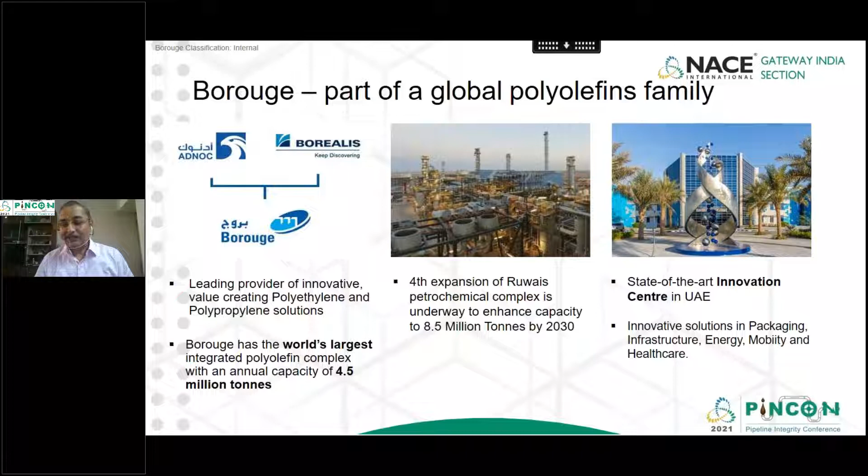Keeping with our innovation mindset, we have a state-of-art innovation center in UAE, and we offer innovative solutions in packaging, infrastructure, energy, mobility, and healthcare.

Couple of examples in infrastructure: we provide raw materials for pipes which are used for water and gas distribution, hot and cold water, double wall corrugated pipe for sewage transport, material for geomembrane, large diameter polyethylene pipes for seawater intake and outfall lines, and three-layer polyethylene and three-layer polypropylene coating material for corrosion protection of steel pipelines cross-country for transportation of oil, gas, and water.

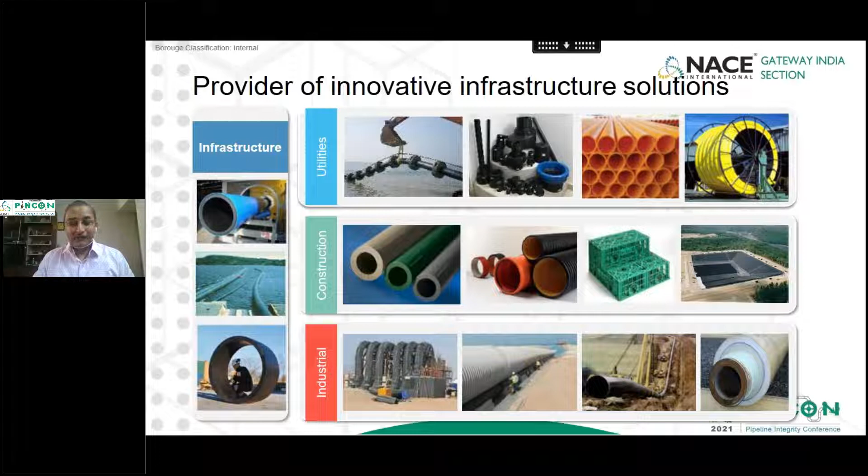Coming to my today's topic, polyethylene is used in different parts of a city gas distribution network. The first part is the high pressure network where the pressure can be anything between 19 bar to 90 bar. There, steel pipes with three-layer polyethylene coating are used. The three layers are epoxy, MDP adhesive, and polyethylene top coat.

In the distribution network for medium pressure lines, orange P100 HDPE pipes are used up to 7 bar pressure. And in the last part of the network, in last mile connectivity, yellow MDPE P80 pipes are used, which are for lower pressure and smaller diameter pipes.

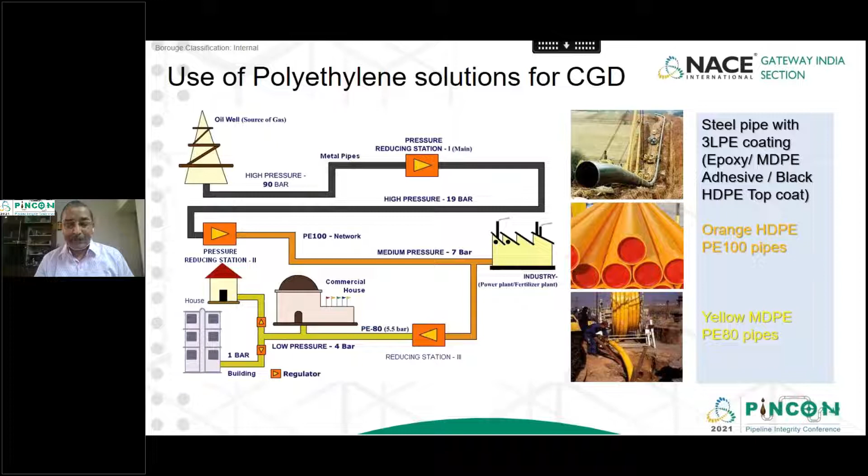If we look at the evolution of gas pipe infrastructure, pipes were used for gas much before they were used for water or sewage. In the 19th century, very early 1900s, they were used for street lighting, and for this cast iron gas pipes were used.

During 1950, cast iron pipes for a short period gave way to ductile iron pipes, but ductile iron pipes did not remain there for long. There were a lot of joint leakages and subsequent explosions which took place in UK, Ireland, Scotland, etc.

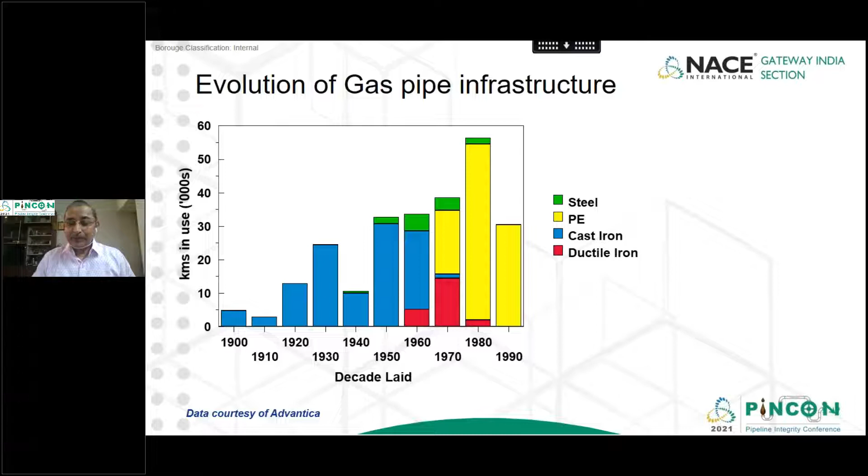Then the fully welded polyethylene system came in, and by 1990s, 2000, polyethylene pipes almost captured the entire distribution network. In 1995, the Kobe earthquake in Japan proved that polyethylene pipes and joints had zero breakage, while all other conventional pipe systems had either pipe rupture or joint failure. This hugely boosted the use of PE pipes in gas distribution.

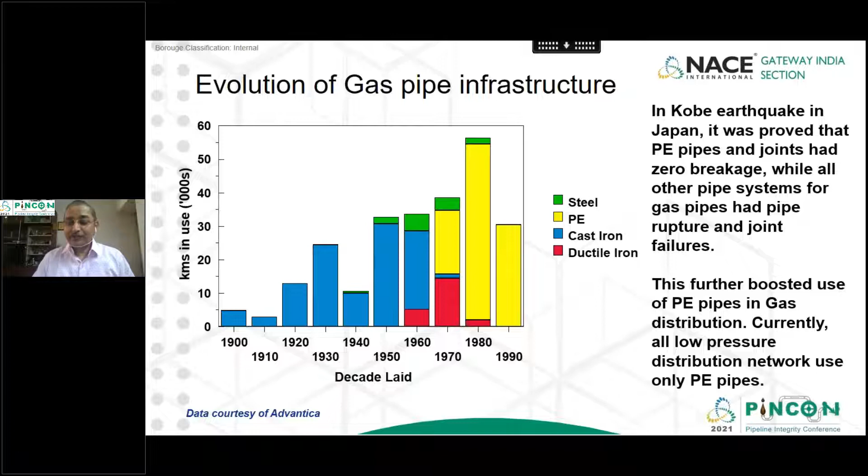Currently, all low pressure distribution networks use only polyethylene pipes. Here is an overview of the city gas distribution pipe segment.

MDPE P80 pipes were first used by British Gas in their CGD network in the 1970s, and HDPE P100 has been used since the 1990s. Some utilities use a combination of yellow P80 and orange P100, while others use only P100 for all their distribution pipelines. Three-layer polyethylene coated carbon steel pipes are used for higher pressures and larger sizes.

In the value chain, it is mandated that pipe materials must comply with individual utility specification as well as national and international standards. The most accepted polyethylene gas pipe standard internationally is ISO 4437-2014. The Indian gas pipe standard is IS 14885-2001, which is under revision.

Three-layer PE coating international standard is ISO 21809-1 2018. This is followed mostly in Europe and other parts of the world, and is followed in India also. However, each Indian oil and gas company has its own specification, and they have taken elements from ISO, DIN, and Canadian standards.

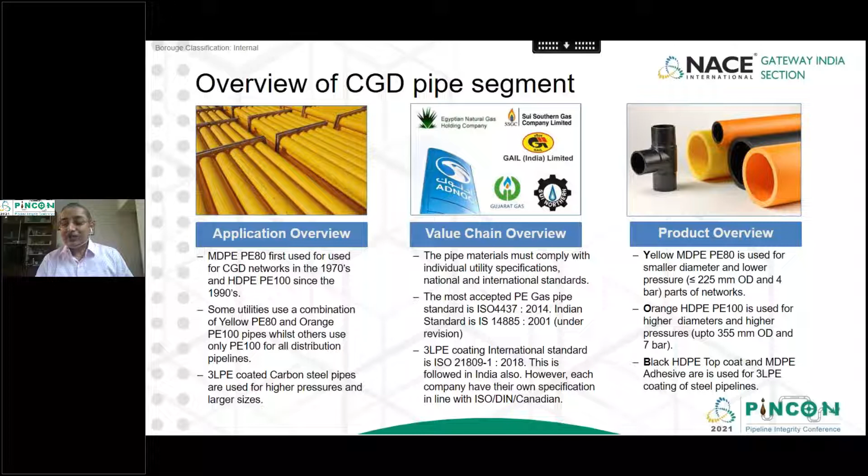In the product overview, yellow MDPE P80 is used for smaller diameter and lower pressure, say up to 225 mm OD and 4 bar pressure. Orange HDPE P100 is used for higher diameter and higher pressures, up to 355 mm and 7 bar pressure. Black HDPE top coat as well as MDPE adhesive are used as part of 3LPE coating of steel pipelines.

Now the debate always comes whether MDP is better or HDP is better. We'll show you both sides.

MDP P80 has certain advantages for smaller pipes. It is a softer and more flexible material. Some gas utilities prefer this, especially for smaller pipes and house service connections. The major advantage is easy squeeze off for service connections and repairs. MDP pipes are easy to coil, reducing the effort of re-rounding pipes that have gone oval. P80 is also easier to weld than P100, being a more forgiving material. Another major advantage is MDP has very high stress crack resistance compared to standard P100 HDP material.

There is a misnomer in the industry: all gas pipes are referred to as MDP pipes, but MDP can only be P80. There has been no P100 possible to manufacture with MDP density. All P100 materials are high density polyethylene.

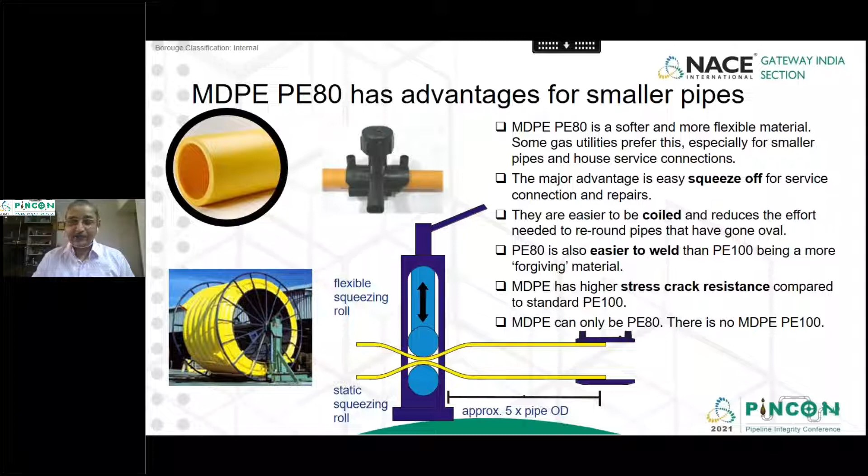Now coming to HDP P100 orange, it allows for higher design pressure. You can see the same MDP and HDP, P80 and P100 material, used in the water industry for up to 16 bar and 20 bar pressure pipes. But in the gas industry, they're used for only 4 bar and 7 bar.

This limitation is because of rapid crack propagation. If a gas pipe is punctured, the crack may propagate instantaneously over a very long distance because gas is a compressible fluid. Therefore, the rapid crack propagation property has to be measured and kept within a limit so that it doesn't propagate indefinitely. Depending on this consideration, MDP and HDP materials are used for lower pressure in gas.

While MDP material typically has a rapid crack propagation resistance of 4 to 5 bar, P100 material has a rapid crack propagation resistance of up to 10 bars. That's why for higher pressure, P100 materials are typically used.

P100 can give the benefit of 17% lower weight per meter and 7% greater bore if used with reduced dimension for the same service pressure. But normally the same thickness of P80 and P100 is used.

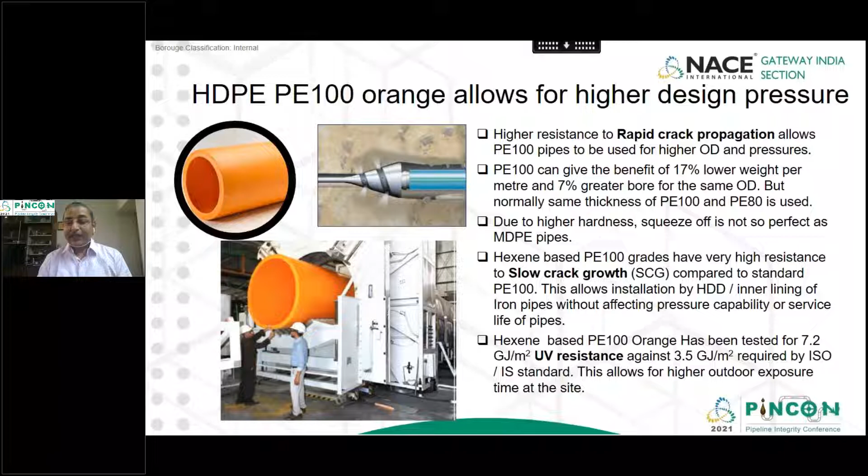Now, higher resistance to UV allows for higher outdoor exposure time at the site.

Why do we need higher resistance to SCG? You can see some of the photos, for example the yellow and blue pipes, they are bent in the form of a U or C section so they can be inserted into a larger diameter cast iron or ductile iron pipe and then reverted back to their own shape. While doing these operations, there can be a lot of notches and scratches on the pipe, and the pipe should still provide 50 years of service life despite these notches and scratches.

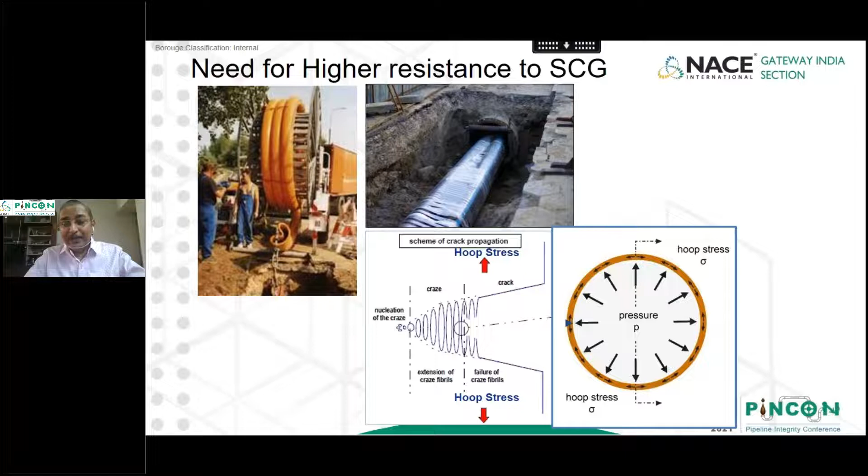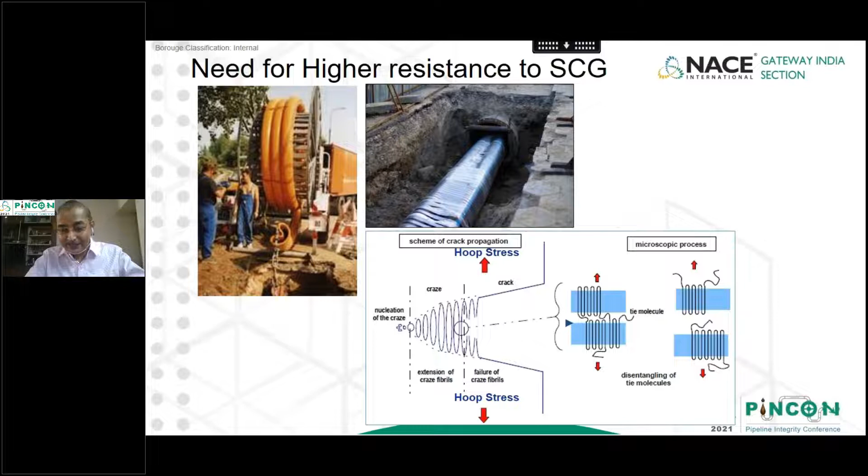When a polyethylene pipe undergoes a notch, it starts opening up like cutting a textile where the threads keep opening up. In the same way, polyethylene molecules slowly get disentangled. If you can have more tie molecules between the crystalline zones to hold them together, this failure can be delayed a lot.

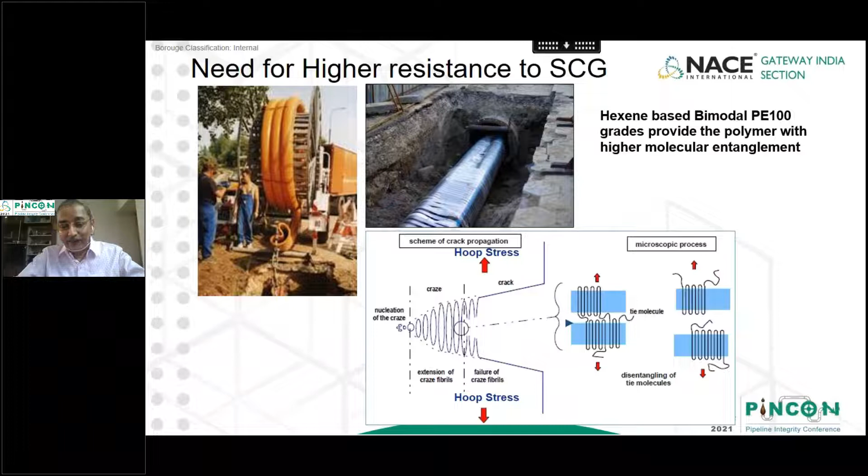Hexene-based bimodal PE100 grades provide the polymer with higher molecular entanglement and give 50 to 100 years service life, despite notches, scratches, and surface damages.

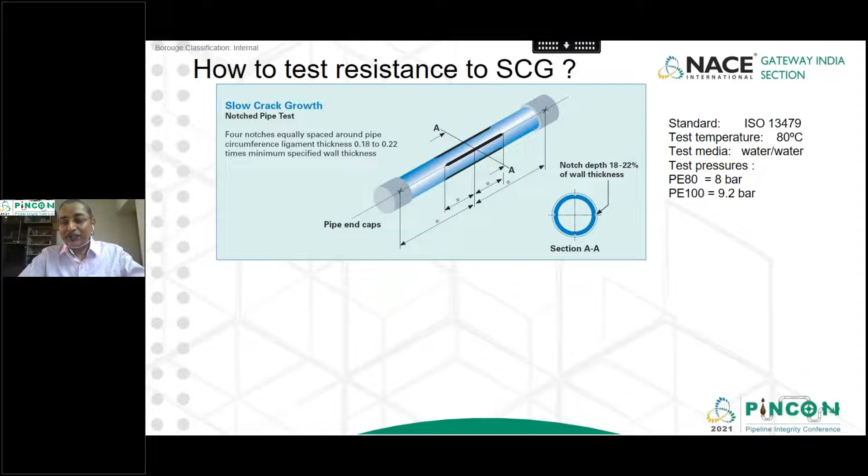How is SCG resistance measured? It's done by cutting 4 notches on 4 sides of the pipe, typically 18 to 22% of the pipe thickness as the notch depth. Then 80 degrees centigrade water is put inside, and outside water test media at 80 degrees centigrade is used, with different pressures employed for PE80 and PE100.

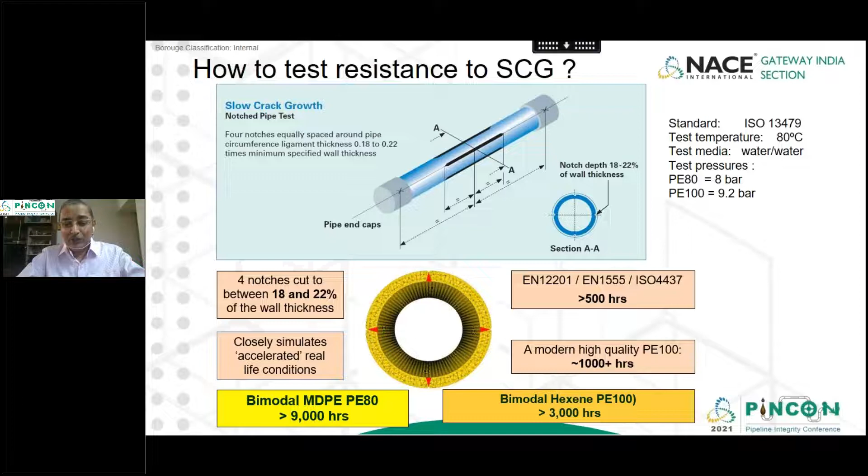EN and ISO standards require a failure time of more than 500 hours. A modern high quality PE100 gives about 1000 hours, whereas bimodal MDPE PE80 gives more than 9000 hours to failure in slow crack growth test, and bimodal hexene PE100 gives more than 3000 hours. So we have a lot of factor of safety to ensure 50 to 100 years service life.

A new development is using polyethylene pipes inside the house as well. Typically copper pipes were used for in-house PNG piping; this is now being replaced with polyethylene-aluminum-polyethylene composite pipes. The same yellow MDPE PE80 is used for inner and outer layers. The advantages are a superior multi-layer solution, lower carbon footprint, and lower cost. Trials in selected localities have been successful, and a major gas company is rolling out this solution.

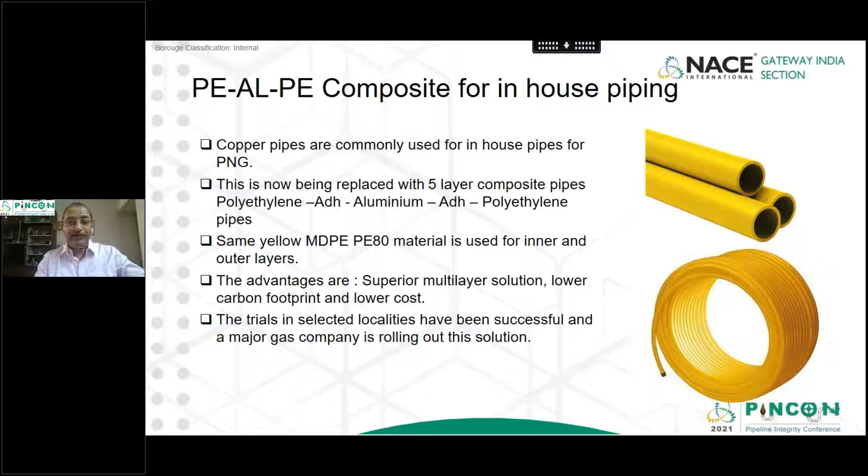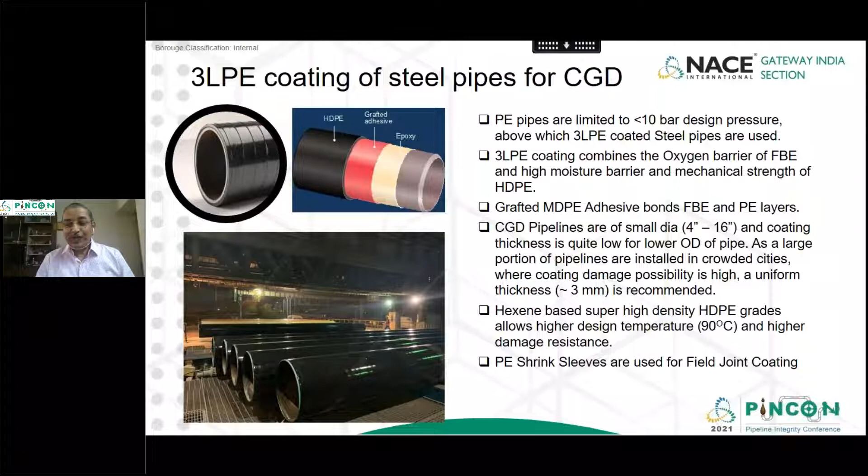Polyethylene shrink sleeves are used for field joint coating. For CGD pipelines of smaller diameter, ERW pipes with 3LPE coating are used. For natural gas trunk pipelines with high pressure, LSAW pipes with 3LPE coatings are used, typically in diameters of 20 to 48 inches.

Black polyethylene has very high UV stability and can withstand many years of outdoor weathering. For long outdoor storage, you need to look at the cutback area, which needs to be protected against moisture ingress. 3LPE coating is the most popular anti-corrosion coating method worldwide and has a long track record.

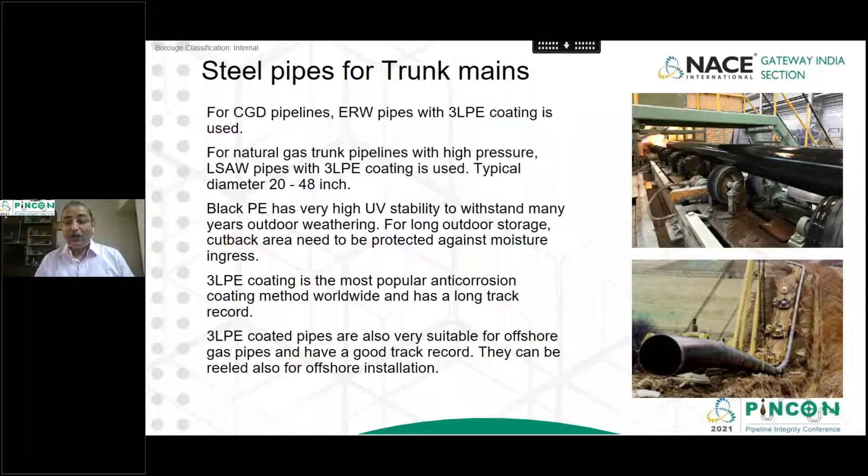Now I come to the end of my presentation, the concluding remarks. PE pipes have become the trusted material for gas distribution networks world over, due to their excellent corrosion and abrasion resistance, good flexibility, and high elongation to withstand surge pressure and impact.

The welded joints provide networks that are effectively leak-free. Bimodal MDPE offers the advantage of easy squeeze-off, welding, and high resistance to slow crack growth. The latest hexene PE100 HDPE materials are suitable for higher pressures, higher resistance to rapid crack propagation, and longer outdoor exposure.

In 3-layer polyethylene, a hexene-based super high-density topcoat is now available, which provides higher design temperature and higher damage resistance. In addition to providing high-quality materials, Borouge provides training of the value chain, assistance in formulation of standards and specifications, technical guidance, and testing services.